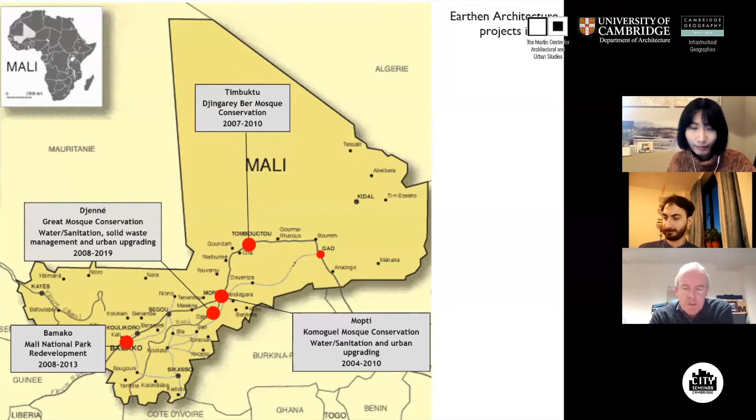So this is the context. Now I'll make a small parenthesis on Timbuktu, because the Timbuktu Djingareyber Mosque is a very important building. It's the oldest mosque in Mali, built in 1345, in the 14th century, making it one of the most important landmarks in the country.

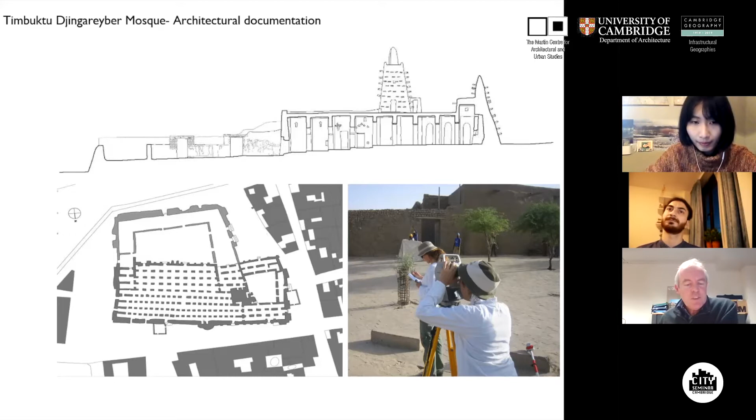What's interesting is that when you start a project, you have to listen to the local masons, who are the tradition bearers. They know where to find materials, they know the quarries, and they know how to prepare materials.

The first thing is to go and visit quarries. This on top is a mud quarry, where the color is very dark - it's a black banco, which is very good for finishes. On the right, you see a quarry for stones, because these stones, found in an almost desertic environment, are necessary to build. This is a start - you identify the sources of building materials, and you need the local traditional masons to guide you in this process. It's also time for testing.

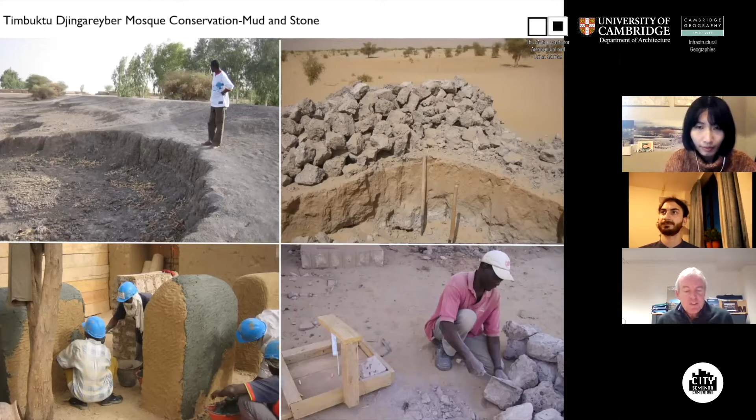So you test on wall samples some of the possible mixes to see the level of shrinkage or success they have. And you start to prepare material and shape them, because this is a very labor-intensive activity. You don't take industrial materials at all, but extract materials from a nearby environment, shape them, and prepare them to be built.

On top you have this tank where the banco is put with water and mixed by human feet. Then the stones are being dressed and made ready for the builder to assemble them with mud.

These are a few pictures of the work in progress, to illustrate this vernacular tradition of a stone building assembled with mud.

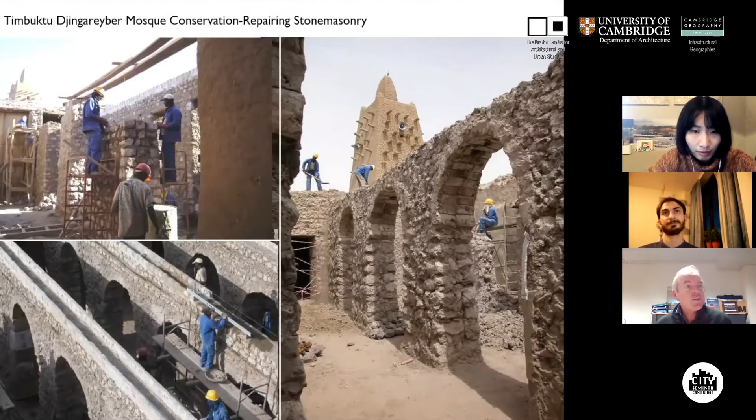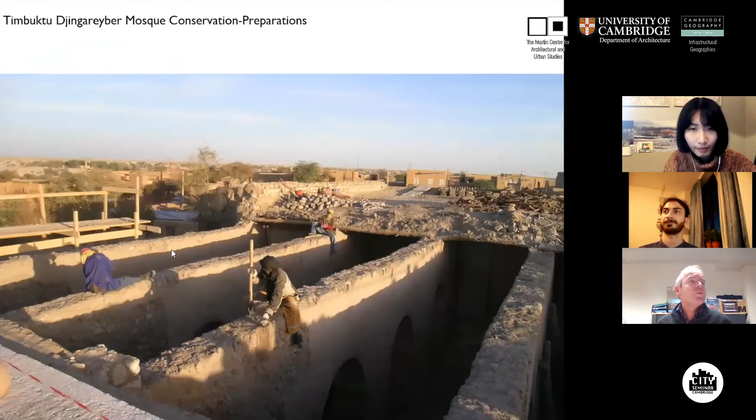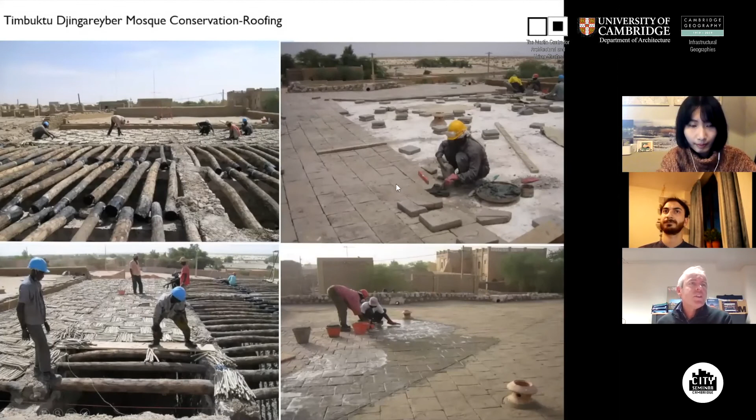This is the roof. It's basically made of very simple palm tree beams covered with vegetable fibers that we take from the small forest remaining in the environment. Then it's covered by mud bricks and liquid mixes.

What happens sometimes is that you make discoveries. Because you pass electrical wires on the floor, you start to make test pits, and you discover archaeology. So you bring specialists, and we have been very fortunate to find the remains of the first mosque built in Timbuktu, 3.5 meters underneath the existing one, with a type of architecture that is absolutely not common, and no one knows what the similarities are.

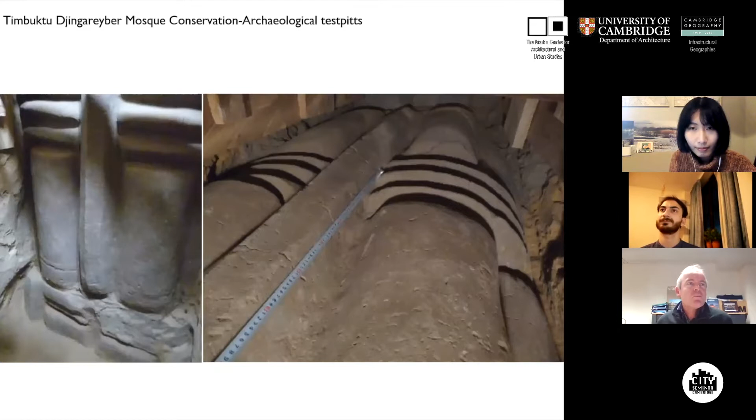What was fortunate is to have kept an element of coal that we were able to analyze with C14 analysis, and it demonstrated that these remains were really built in 1340 to 50. So we came to it.

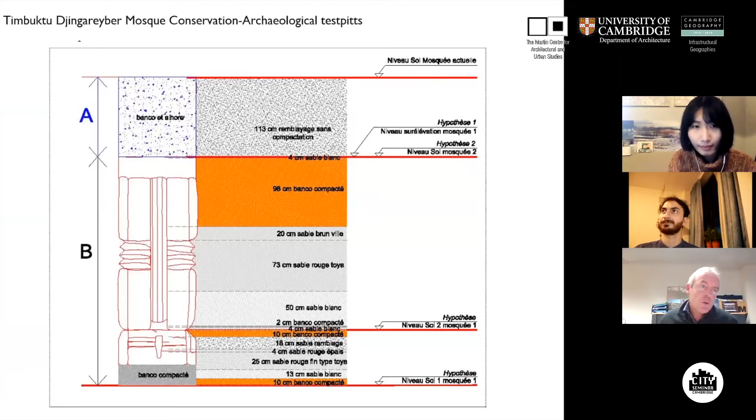And these are a few pictures of the completed conservation, just to illustrate.

So it's time to move to Djenné, the real topic. The idea was to make a small journey through Timbuktu to understand the kind of old historical special mosque. Djenné is a different case.

Djenné is really located in the core of the Niger Delta, right in the middle, where only mud is available, and very good mud. So it's a mid-sized city, which is a peninsula.

This is an aerial view, which explains well how this city is. It's a city surrounded by water, which is flooded. The flood affects it greatly, because when water is high, there is only one way to enter the city, through a bridge. When the water is low, you can more or less access everywhere by car.

So it's a dense urban fabric with no possibility to expand. People are limited to what they can do. And it's surrounded by the Bani River.

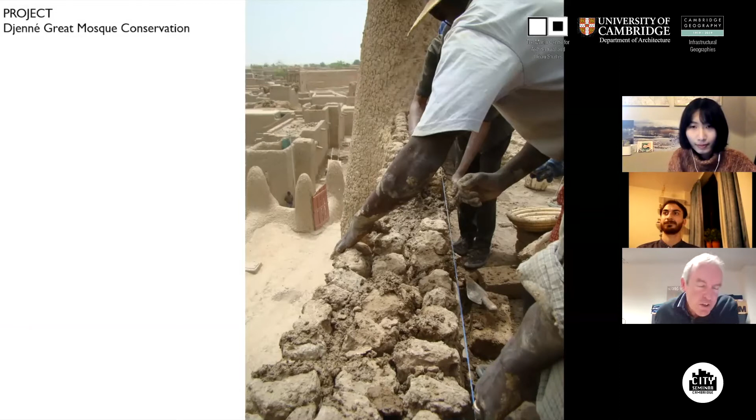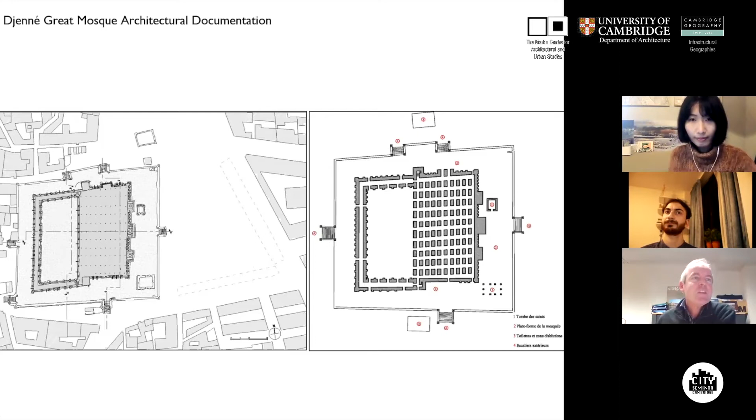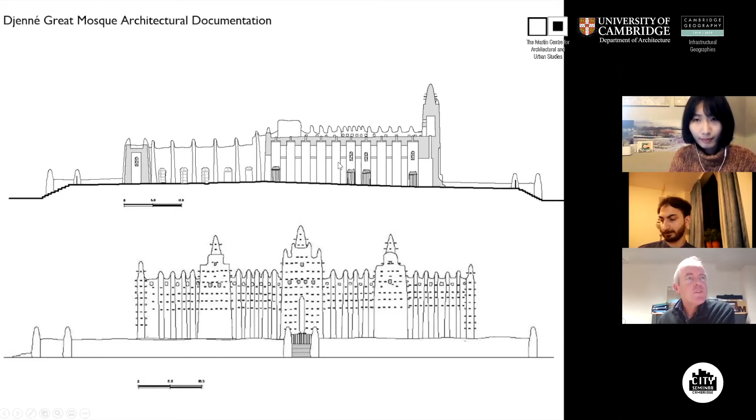So this is more or less how the mosque is. It's a building that was in an acceptable condition from the appearance, but turned out to be quite dilapidated.

So what was the problem mainly? It's because additional layers of Banco over the years, over 100 years, made a crust hiding the structure. So when the structure was in bad condition, simply you could not really access it because it was covered with a thick layer, and this thick layer is almost 20 centimeters thick. So one of the challenges was to decide to remove this crust to be able to assess the stability and the level of conservation of the building.

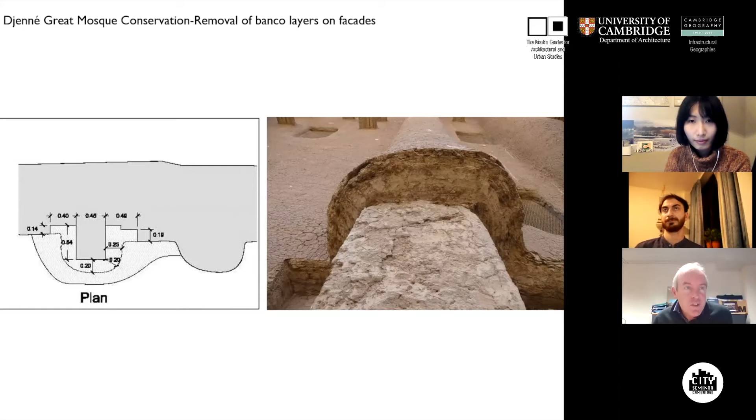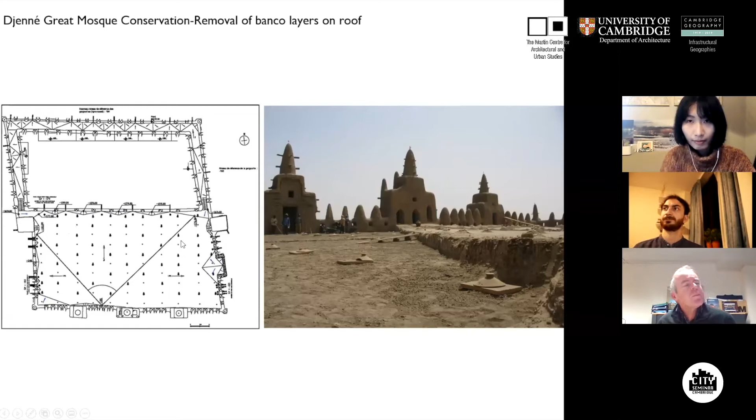And the roof was the same case. The roof was overloaded by, we have estimated, about 500 tons of Banco added over the years, which had to be removed because the beams were totally in bad condition because of this load. And the difficulty was also to find a way to drain the rainwater.

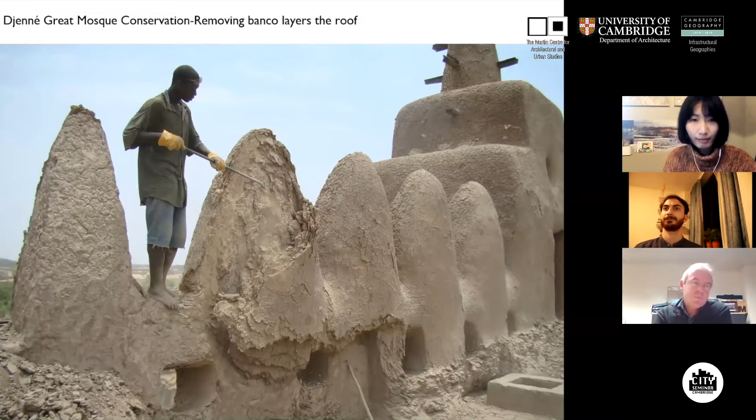So what happened initially was simply to remove the additional crust to access the masonry and understand if there was a need to stabilize it.

And at the same time as exposing the structure, then came the issue of manufacturing bricks, because maybe you have never seen bricks like this - these are bricks which are like small cylinders, like yogurt pots. They are called djenné-ferey. They are specially made in Djenné, and they are made of mud and of organic product like a fruit of the baobab, which is crushed and plays a role in the stability.

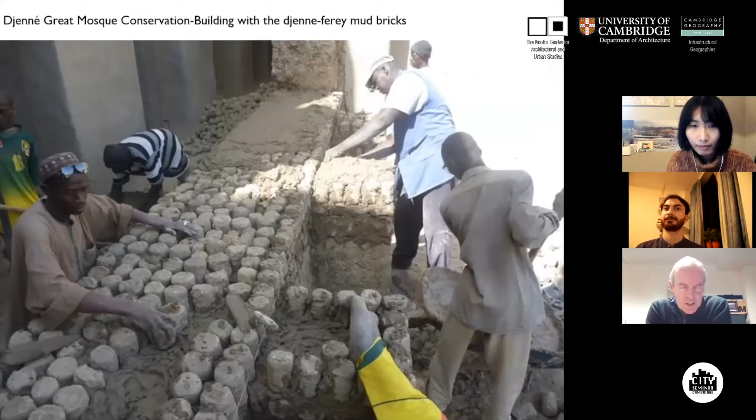And it's purely handmade. You see the masons, they are seated almost, and they manufacture bricks by thousands. And the way of building is very special, because it's like putting together those kinds of small cylinders on thick walls and layers of mud, layers of mud. So it's very time consuming and very labor intensive, but it's a very traditional element, and only local masons know how to manufacture them.

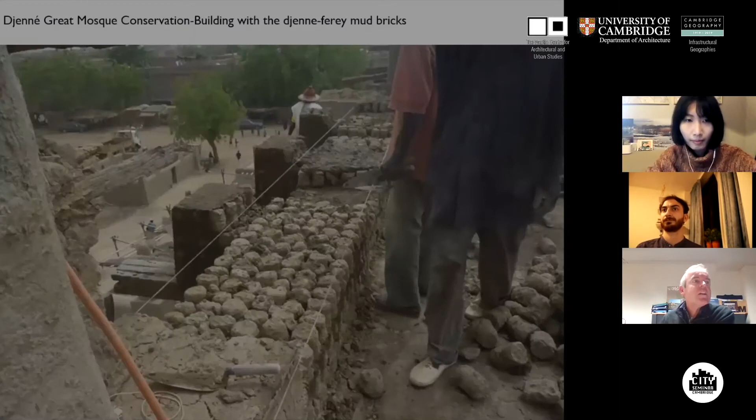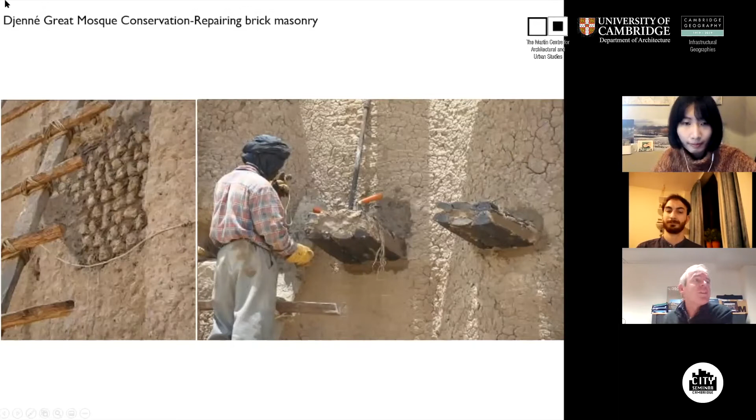So you see here, same story - the main tool is the hand. You use a trowel to distribute the mud, but mainly the hand is the only tool. And you repair the bricks, you repair the missing zones and the zones which are unstable by fixing them with this Djenné technique.

And not only are the bricks laid horizontally like this, but they are also stabilized by wooden studs, which are inserted in the buildings to try to provide some anchoring for this system. Because this system has the inconvenience of creating big cavities inside the walls where the termites can go up.

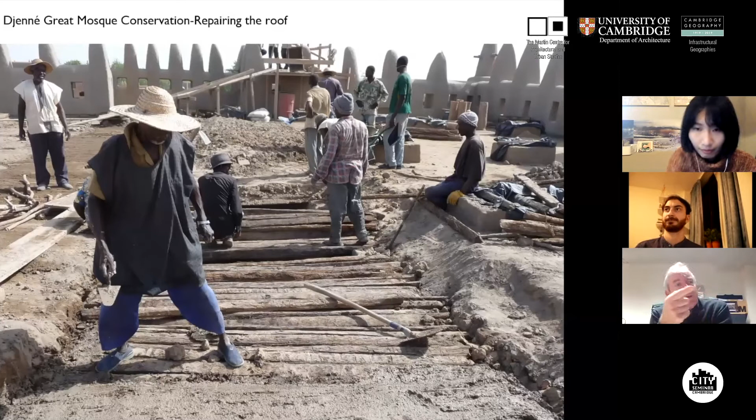Also some examples of roof, how the roof is done. So the roof is done with palm tree beams, which are cut into four to create beams. So it's a very labor intensive activity also, because most of the beams have to be replaced because palm tree beams are not meant to be wet a long time - then they become totally unable to sustain the loads. And the tradition is simply to repair the roof and then lay on top of it layers of banco stabilized with organic products to create water insulation.

And this is only with materials coming from nearby environments.

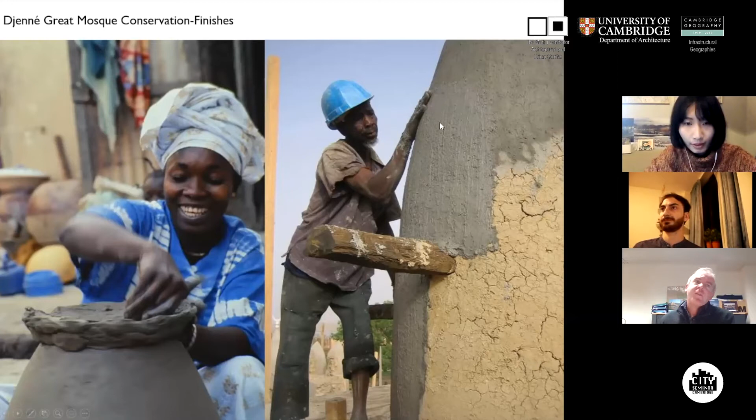Otherwise, all mud is used just raw, without being baked. And here you see people at work. This lady, Khadija, makes those skylights simply by hand, preparing them one by one and burning them in an oven with grass being burnt. And the person on the right makes the finishes of the plaster. You see this kind of dark gray plaster - it's this banco noir, black banco, which is the finishes, and it's applied by hand. It's only a hand practice.

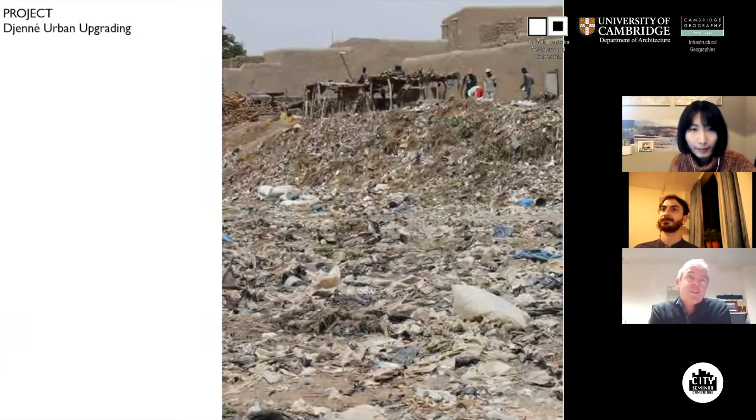So something of a problem in Djenné is that there are byproducts of modernity, which is solid waste. The idea was not only to work on historic buildings, but also put an emphasis on the surrounding communities and improving their quality of life. And the quality of life of communities comes from potable water access, sanitation, solid waste management, and all urban problems that are not being dealt with by municipal authorities.

So the first idea was to try to show the municipal authorities their problem, because they get used to them. So the idea was simply, as a process, to tell them if they think it is the best way to deal with urban issues.

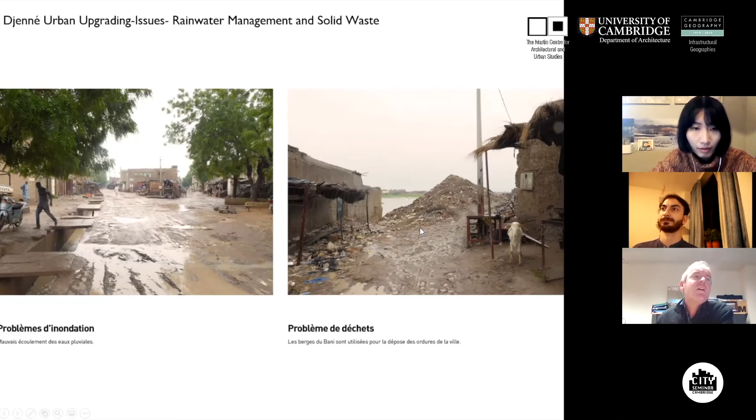So you see in these pictures open drains like this, or the river bed surrounded by waste. Open drains don't work simply because they are full of waste, and so young children cannot go out of their home without risk of falling into the open drains. These are simply things that if you fix them, you improve the quality of life drastically.

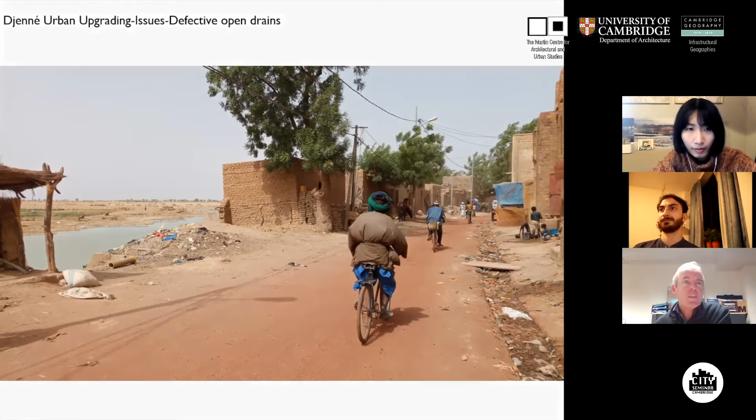And something else is that in spite of the respect for community buildings like the Great Mosque, there has always been parking all over and neglect of the public space. You see after the Monday market, people stayed a long time, buses came. It's always without respect for the place.

And when rain came, the bad rainwater management meant it was almost impossible for pedestrians to cross the Monday Market Square, simply because it was full of water and not being drained properly. So simply showing those pictures was a way to open the eyes of authorities and communities on what could be done to improve their lives.

Example: solid waste accumulated simply by neglect and bad management. So what came as a process was simply to see how we can advance some ideas, having the community endorsing projects, giving opinions and setting the order of priorities.

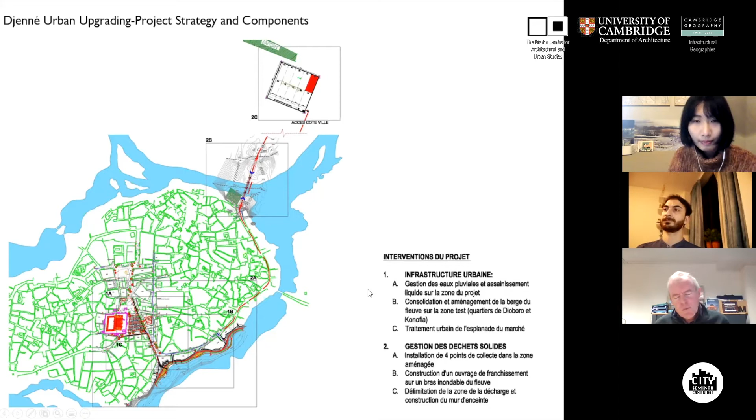Very soon, the main component of the project that required attention from the community was solid waste management. We had not anticipated doing so much on solid waste, but it required a lot of interest, simply also because people had never been able to address this before.

So we had to bring in specialists to study behaviors: who takes the solid waste out of the household and brings it, and where do they bring it?

What is it about? Why do they put all the waste on the shores, on these points?

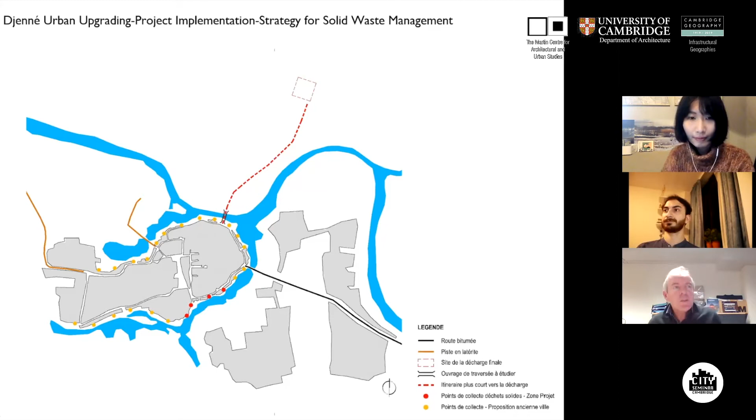So we discovered that the main actors of the solid waste management are the women, simply because they are the ones who take the waste out of the home. And it was really a matter of understanding more how to change behaviors and help them with better systems.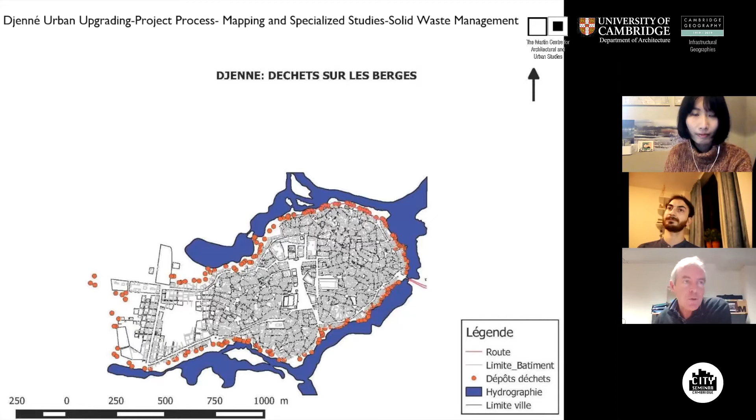So you see, there was waste everywhere, and we brought an environmental consultant from Mali who studied very well the anthropological aspect also of the waste, because it goes down to the level of habit.

So we discovered this very simple graph shows you that shops didn't create anything. The Monday market was just creating very little waste, but the main source of waste, which was 5,000 tons, was created by households.

And the second graph shows you that almost 73% of the waste is made of organic products, so can be compostable. So this was one of the good news, in the sense that most of the waste can be compostable, and only very little was to be burned.

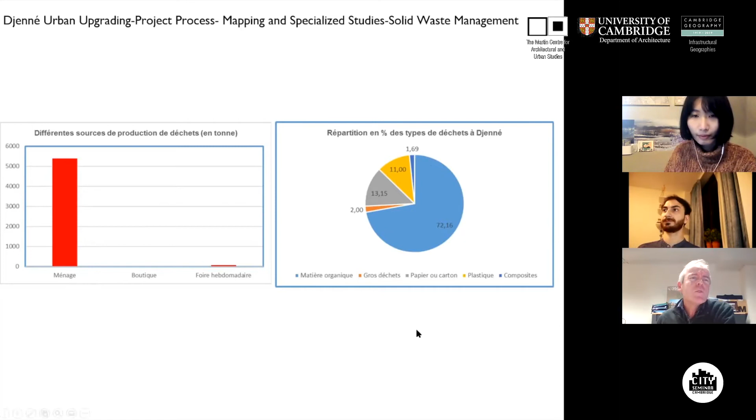So to deal with solid waste is a long cycle from the household to the final discharge. And you have to look at, first, how to collect the waste and to be as close as possible to the households, so that they feel interested to deposit their waste in a point which is organized for this.

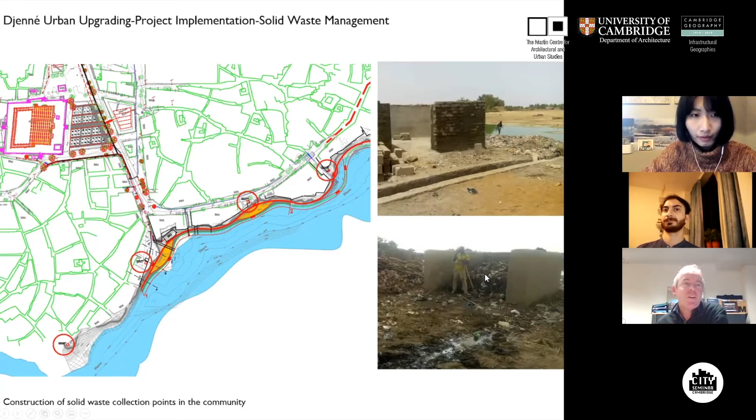So we developed a series of collecting points based on the density of people dropping their waste by a survey. And we built simply very simple deposits. And then came the question of how to carry them.

So there was a discussion with authorities and communities. People thought they would like to have vehicles, trucks, like in our countries. Simply, the density of the urban fabric didn't make it possible to access the solid waste points with trucks, because trucks require at least 2.5 meters to pass.

So we opted, after 10 different experiments, for the solution of donkey carriages, because the donkey carriage is the most practical and cheap solution to go everywhere. And so the deal we found after months and months of trials and errors was that...

The operator of the donkey carriage would work for the community in the morning, controlled by the district leaders and community leaders. And if the work is well done in the morning to carry out the solid waste, the person can work for his private activities in the afternoon. So it was a way to create a kind of incentive to maintain the property well.

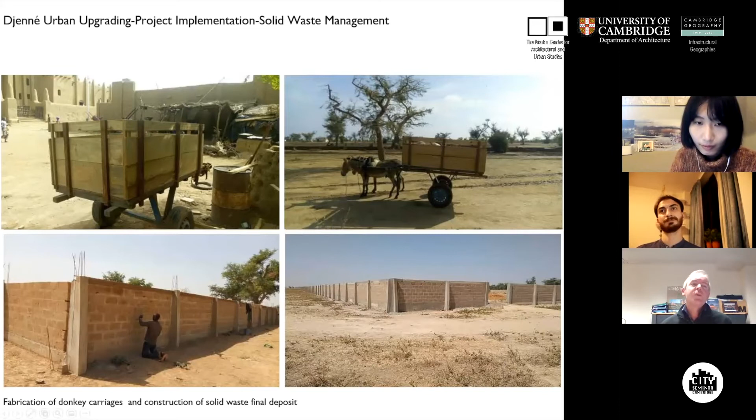And you see down the creation of the final discharge on a place that was not flooded, which had been very well studied to be accessible without difficulty. Only a problem came because when the city is flooded during the rainy season, one of the accesses to the final discharge is being flooded like this, as you see here.

So we had to equip the city with a pedestrian bridge for the donkey carriages to access directly all year round the final discharge.

Because if you do not make it simple for people and convenient to deal with solid waste, you can be sure that nothing is going to be sustainable. So that was an unexpected activity that took place.

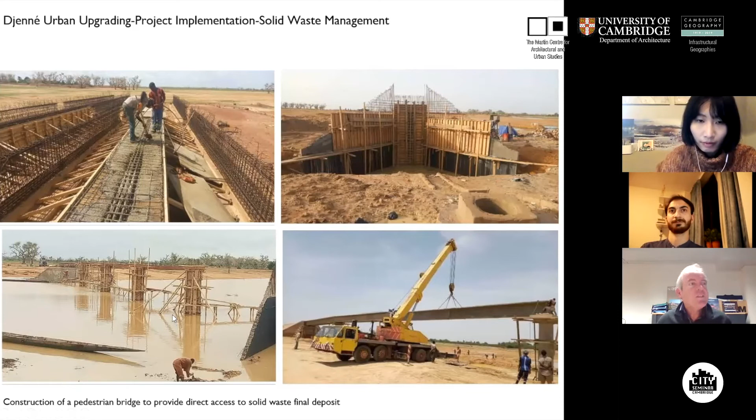And you see the level of this pedestrian bridge is about 250 meters long and is double. You can cross with donkey carriages, and basically it provides direct access between two areas, one village and the city, all year round also. So it has really changed the way of life for people.

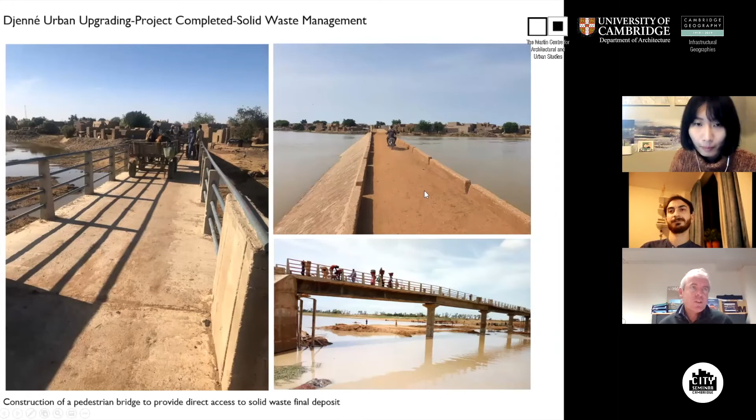Then another dimension to the project is the rainwater runoff system that was not at all working. So I will not show you too many plans, but we had to work with plans to try to use gravity to capture rainwater and bring it to the river.

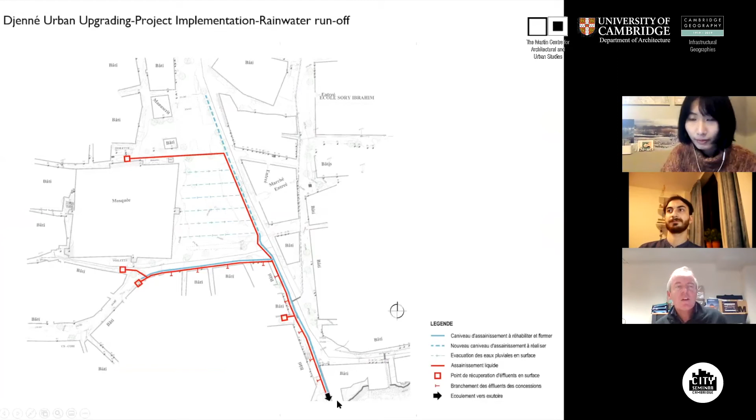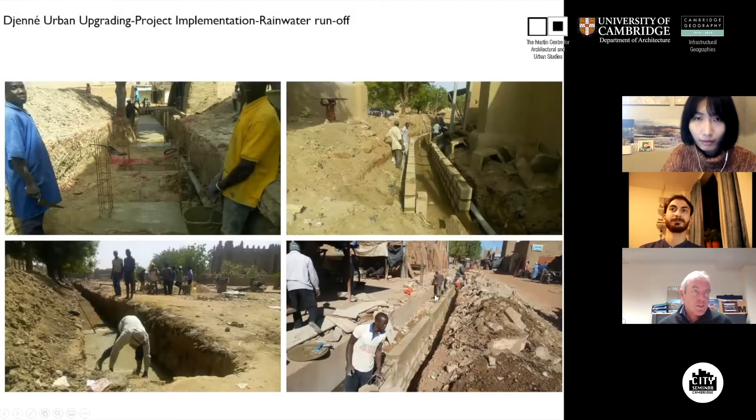And so you see, it was simply improving the rainwater runoff system by rebuilding the channels, the covered channels. And then we dealt also with the solid waste, the sanitation, because you see that sanitation has never been very well dealt with.

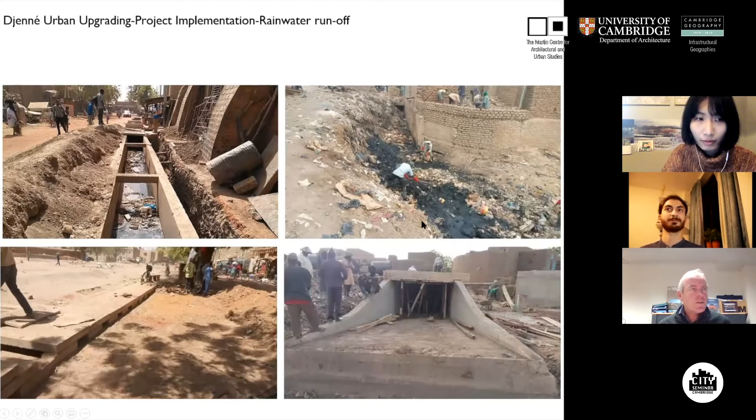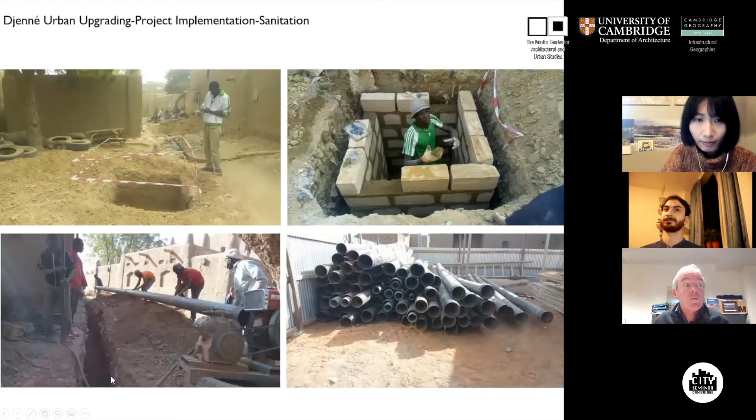Sanitation simply because open drains create lots of problems for the people. We had to think about an underground sewage system, like in most countries, but in Mali, things are not always the case. So with manholes, simply you see manholes and PVC pipes put below grade.

And with a sedimentation tank, where the effluent can stabilize before the water is being discharged. So it's a very simple gravity system, which was needed at the time.

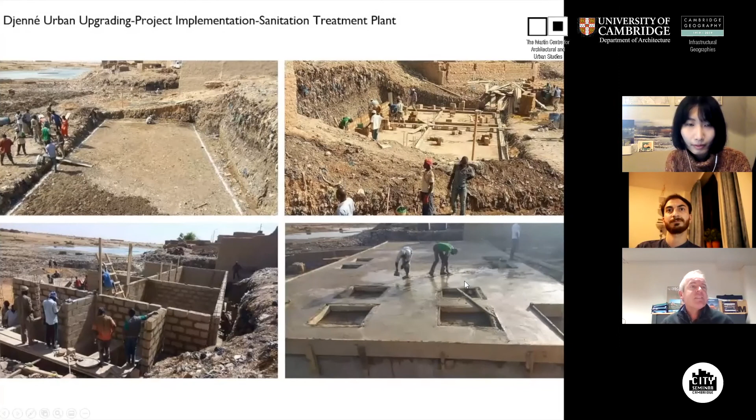So what was implemented was this network going into the effluent treatment plant here. So it affected probably 800 persons and about 70 households.

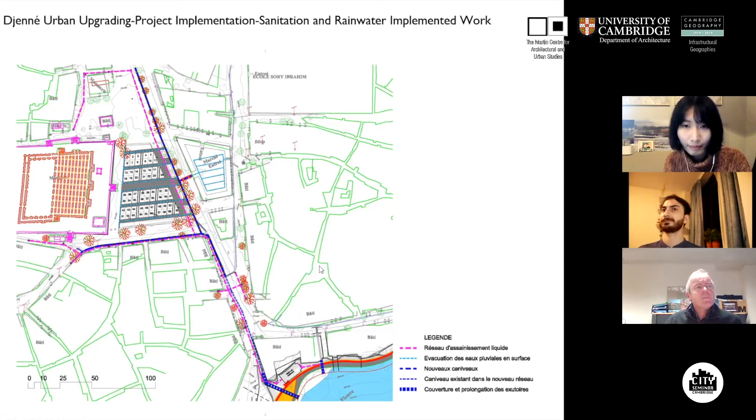Then there was also a dimension that was very much needed because of solid waste accumulated. You see solid waste everywhere, and that was a problem. So we thought that in this pilot project, we would stabilize the shores, the river shores, to at least provide a decent access and relationship between the city and the water. Technically speaking, we used a gabion technique, simply because you can adjust and adapt to the size of the place very simply, and it can be done locally with chicken wire.

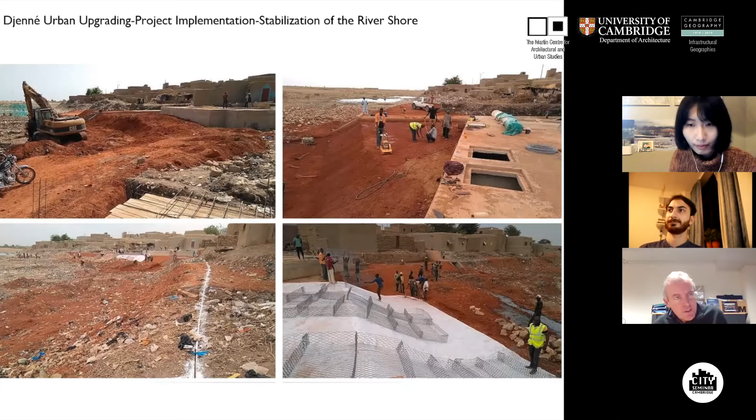That was the advantage of the system, and it was labor intensive, providing lots of jobs and employment. You see crowds of people filling the gabions, using crushed blocks, and at the end this provided a peaceful open space for people to enjoy the space between water and the city. Boats could be used directly from carriages to go into the Bani. So you see, the quality of life is really the driver.

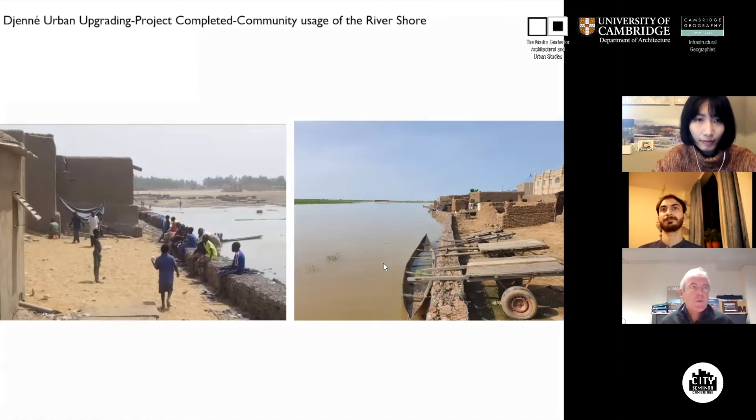So, implemented work - I'll show you a plan at least to understand the scale of things. It's not small, and even if it's only a portion of the city, things are quite large.

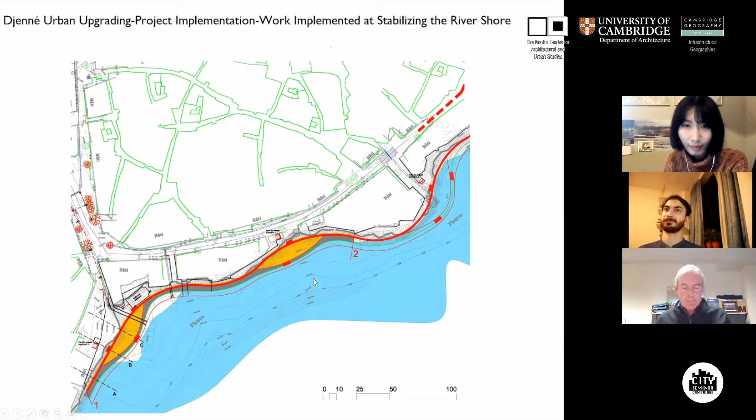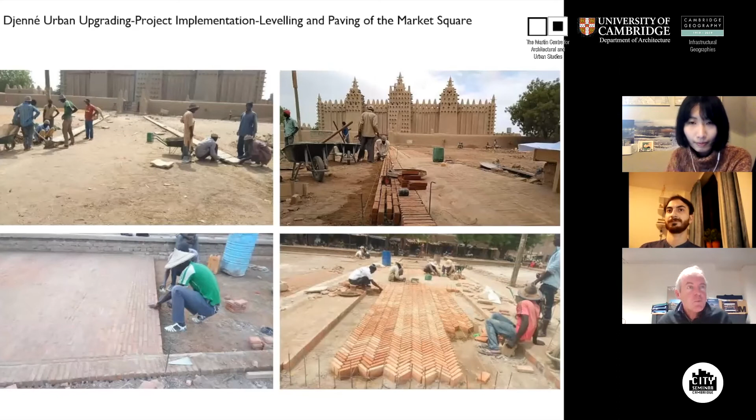And the final dimension of this urban upgrading project was to pave the market square and treat it for pedestrians. We used baked bricks because this created a lot of employment also in the community, since we had 10 different suppliers to provide them. So the main accesses were made of red burnt brick, clay bricks, and the filling was done with banco.

So I think that's my final slide. And then I would like to invite you to a discussion on my conclusion. I would like to ask you to come back to the question raised for the seminar, if it's a place of vernacular creativity. More generally, if a city should be carefully planned, or should it be from a self-organization of the people? And how do we see or imagine a creative urban future?

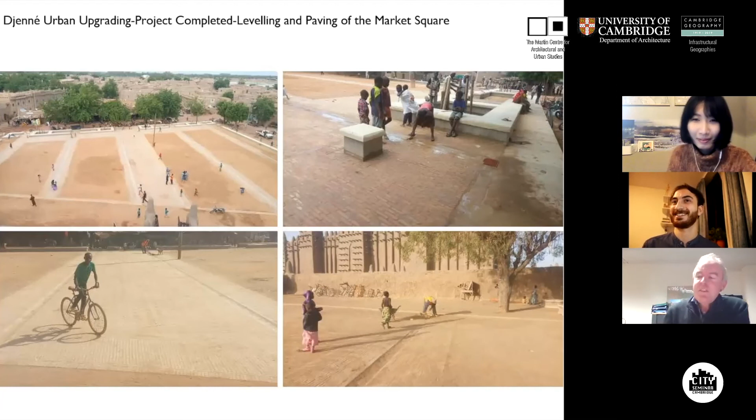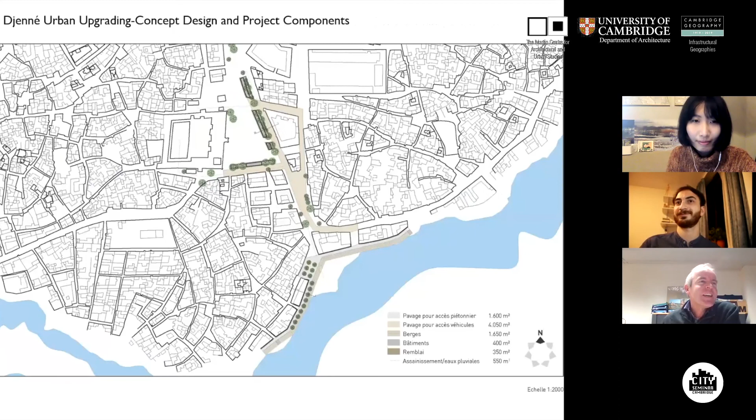I haven't found very good pictures of the interior. Maybe I should go back to those slides—it's better to have supporting documents so you can see. This is the mosque, yeah. It goes too far. Okay.

The interiors are made of vaulted, very high vaults, and they accommodate about 1,000 people for Friday prayers.

One of the first interests by the community for the interiors was to get rid of the colony of bats living on the ceiling. During daytime, the bats—large bats, about 800 of them—were suspended to the ceiling, creating lots of trouble for people on the carpets. We didn't expect this, but it turned out to be the most important thing. We had to find a way to exclude the bats without harming any animals, simply by closing one window after the other and bringing them outside without destruction.

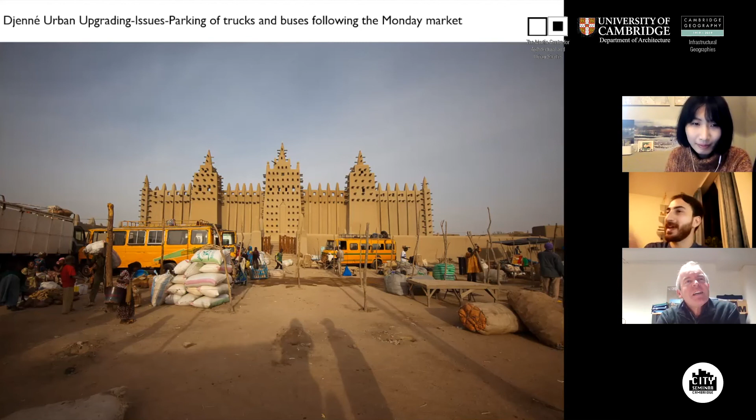We also have a fairly technical question: what is the typical column size and the typical span between columns? Let me go back to the restoration slides so we can see.

In this picture, you see that the span is never more than 2 meters 60. This is given by the capacity of the palm tree to hold, to be stable under the load of a roof. It's the same case in Timbuktu—the span is never wider than 2 meters 60. This really limits the dimension of each row of a mosque; it's the span of the palm tree.

We also have an interesting question: do the policy and building codes in Mali allow architects to build with earth in cities? That's a very good question, because this is one of the threats for earth architecture—building codes and codes of practice don't allow building with mud to get a license in Mali. In countries like Germany and France, the actors of urban architecture have been able to pass a codification into the main corpus of standards, gaining the capacity to build with earth. But in Mali, you don't get any building license to work—the community gives you the license to work.